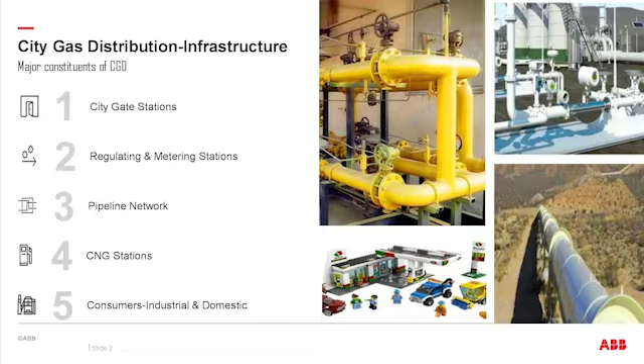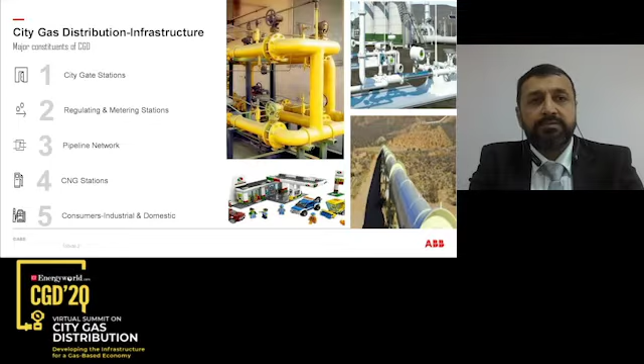So, what are the major challenges? A typical geographical area is widely distributed. Hence, firstly, it calls for meticulous planning to consider both the present and the future demand. And along with that planning, the infrastructure needs to continually facilitate the last mile connectivity as the network keeps on expanding. Now, the next point is maintaining the requisite flow and pressure in the growing network while keeping a strict vigil on the inventory, and pilferage control is no lesser challenge either.

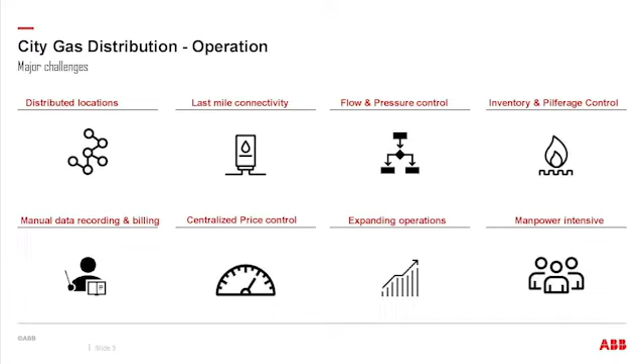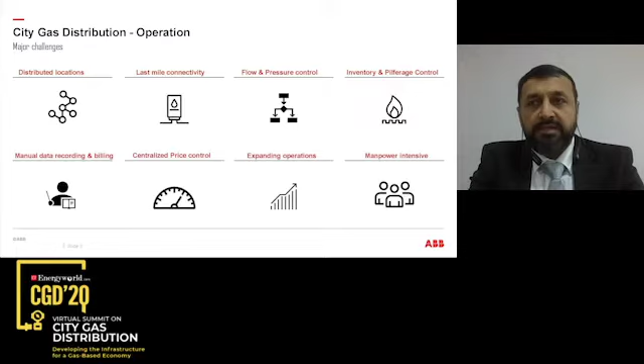Another very important factor is the ability of centralized price control and management. Now, since the CGD prices are subject to frequent changes, this would not be possible to achieve without a strong operational layer through which, with minimum intervention, price change can be administered across the entire network. And with ever expanding CGD networks, the selection of the right level of automation to eliminate manual intervention so that the CGD companies can achieve more with less is also a very critical point.

Let's look at the CGD infrastructure layer. Measurement, control, remote telemetry, and communication are the four pillars for building a resilient infrastructure layer. Gas flow measurement is achieved through flow meters and flow computers, whereas the gas chromatograph measures the gas quality. Add to this, transmitters, detectors, control valves, and the leak detection system ensure that the operation continues to remain safe and reliable.

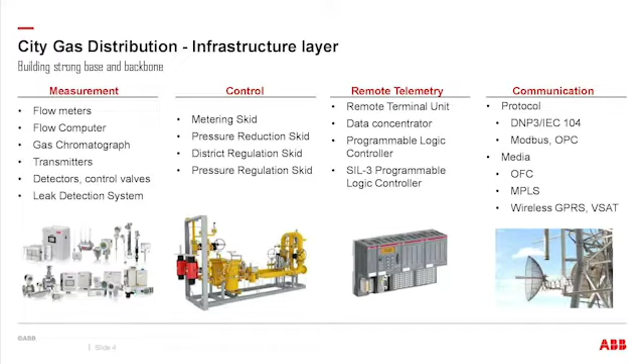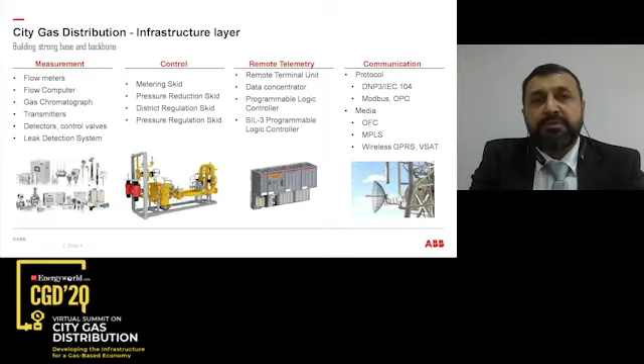After having achieved the measurement and the control layer, the next vital thing would be to have a real-time transmission of the field data to a centralized place. So once the complete measurement has been done, then RTUs or data concentrators or programmable logic controllers, through an appropriate communication protocol, through an appropriate communication media, which would be the best suited communication choice for the given geography, would ensure that the measurements are transmitted in real time.

Now, having realized a strong backbone at the ground level, which was the measurement, control, and the transmission layer, the next important thing is to select the right operational technology. That is the supervisory control and data acquisition system, which we all popularly refer to as SCADA. From our experience, we can say that execution of this very step often determines the strength and robustness of the CGD operational layer. And hence, in this slide, we will dive into the most important aspects that should be considered while selecting the operational layer, which is SCADA.

Firstly, for CGD, often the need is to have an ability to start small and expand with time. Hence, scalability is one of the most important factors for technology selection, such that the high performance real-time database management system would continue to effectively handle the growing needs of a gas network without any limitation whatsoever. So the idea is that you should be able to start with a smaller footprint and then continue to increase the footprint as the consumers, the network, and the spread in the geographical area increase.

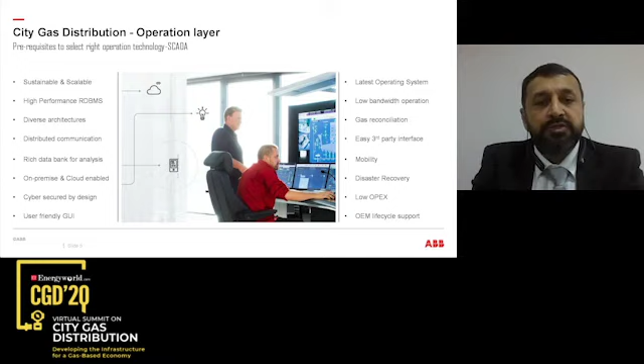The very important point here is also about selecting the SCADA system which is with the latest operating system, since it will enable a longer life cycle and it will support the very cause of operating a CGD with very low operational expenses. Selecting something which is latest would ensure that the overall OPEX cost is optimized, and hence the selection of the operational layer is one of the most important and a key contributing factor in the CGD operations.

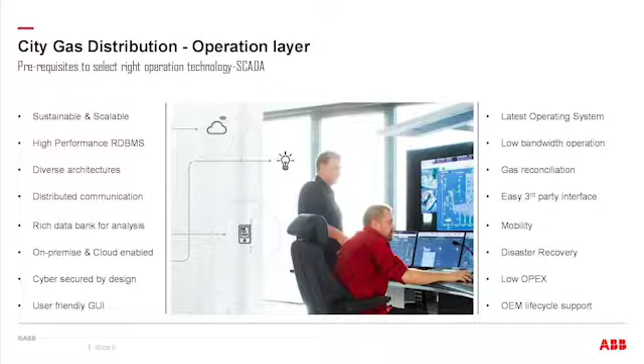Now, after having established a state-of-art operational layer, in the current times when things are becoming open, it is very vital that the platform that we have chosen is also cyber secured with adequate prevention mechanisms, which can range from, say, system hardening, robust password policies, user management, role-based access controls, maintaining the audit trails and security log, and the list goes on up to whitelisting of the IPs to ensure that only the whitelisted users have the access, thus preventing any non-certified or non-authorized user from accessing the SCADA system.

It is also important that the SCADA operational layer should be designed in accordance to IEC 62443 standards and recommendations thereof. Now, having established a cyber secure and state-of-art operational layer, the next thing which the CGD company would want to have is a seamless bidirectional transfer of data between the SCADA system and the chosen ERP platform.

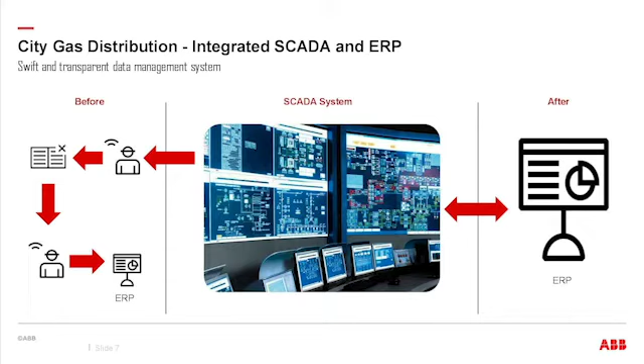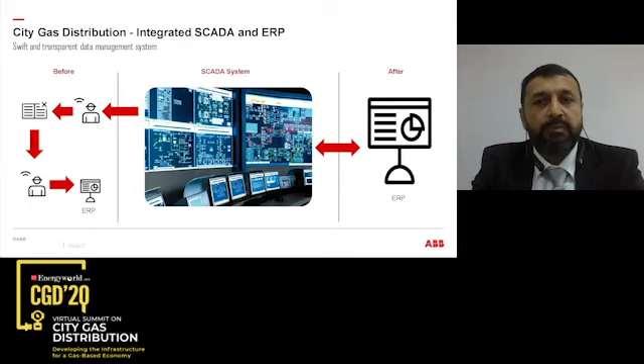And why it is important is because a bidirectional interface between the SCADA system and the ERP would ensure that there is no manual intervention, there is no manual logging, and hence there is no manipulation or room for manual error. So with this bidirectional transfer, the data integrity would be ensured, and it will also introduce complete transparency from field to the boardroom.

Last but not the least, let's also make the life of the operator or the person who is operating or managing or monitoring the command control center as comfortable as possible. Well, there are various choices that we have today of going for a multitude of screens with large display walls, which are very difficult to maintain, or we have some conventional solutions which offer very poor collaboration.

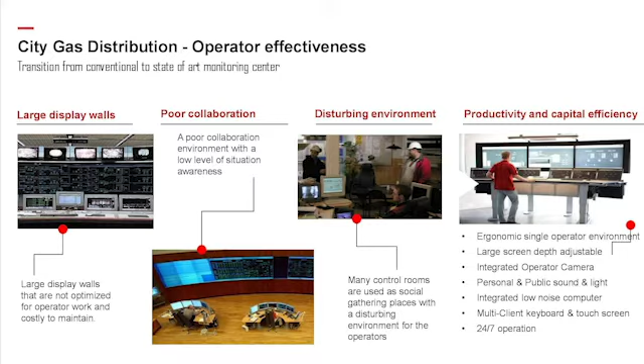However, the need of the hour, and what we have seen from our experience all the customers are adopting, is to have an environment which is stated on the rightmost side of this slide, which will promote the sense of collaboration, which will have all the information available to the operator on a single click. An operator will not be required to figure out information looking at various monitors or various screens, so much so that even your live video feed, the GIS, all of them can be integrated at a single place.

Now, with a strong base and the backbone in the field, which is complemented by the right selection of futuristic SCADA solution, digitalization is only a step away.

We, in fact, with all of these now have an Industry 4.0 ready platform to implement mobility for ease of operations, to have on-the-go data availability for actions, dashboards to monitor gas bought, gas sold, utilization pattern which can help decipher how the utilization changes across consumers, seasons, and all of that possibility is now made open.

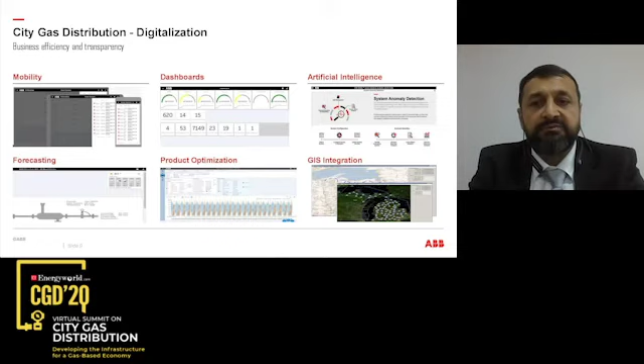This will also open up a possibility of artificial intelligence and a forecasting mechanism that would continually adapt based on the database which will now start building upon with time. And that rich database that we'll have will open up possibilities, operational efficiency.

And now if we club GIS integration along with this, it will add the feature of accurate identification of assets, their management, having video feeds of any such assets or any such operational requirement that we can actually think of. The whole point is that once we have a robust layer at the bottom, the possibilities then are unlimited.

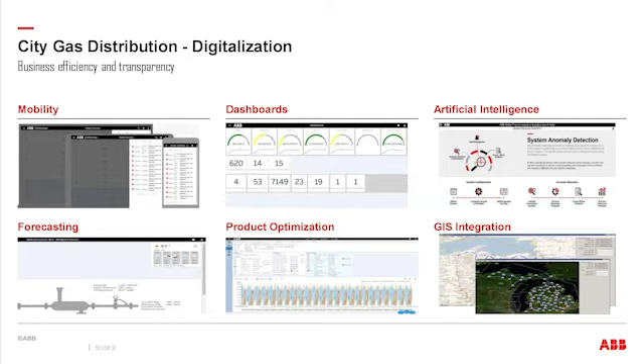One interesting topic which I would like to touch upon here is drone-based leak detection system. We all know and we do realize how important it is to identify the leak and arrest it in the shortest possible time for continued safe operations, for the overall safety and also the overall reputation.

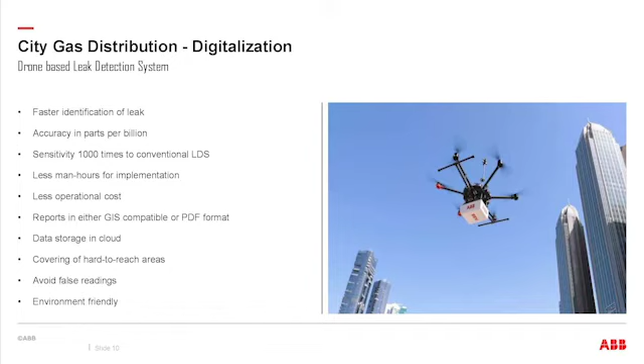The drone-based leak detection system with an inbuilt gas detector will not only improve on the response time, it will also improve on the accuracy, it will also make the whole process faster. And if this is mapped with the GIS, it will facilitate the accurate identification of leak location with the longitude and the latitude. Now we'll have a look at a few case studies here.

The first such case study is on Assam Gas Company Limited. The challenges that the company faced were on the ability to optimize the gas flow and ensure that the contracted volume is delivered to the user at the given flow and pressure. And this was achieved by implementing a strong measurement and control layer in the field, comprising of instrumentation, control, RTU, and a customized telecom solution to overcome bandwidth challenges.

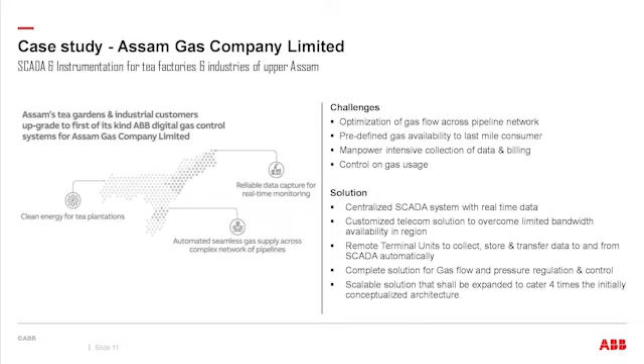Now, with this strong backbone, the data was then made available for centralized control and monitoring, along with gas reconciliation. The offered solution is also completely scalable to cater to the multifold increase of users across the state of Upper Assam.

Next case study, which I would like to share here, is on the SCADA system that was initially deployed for only a very few locations. However, in a span of few years, it has grown multifold, encompassing a very, very vast geographical area and efficiently catering to the expanding network, both of stations and the users. This is a true example of a SCADA system that can be deployed with a very small footprint and then expanded with time with practically no limitation on scalability.

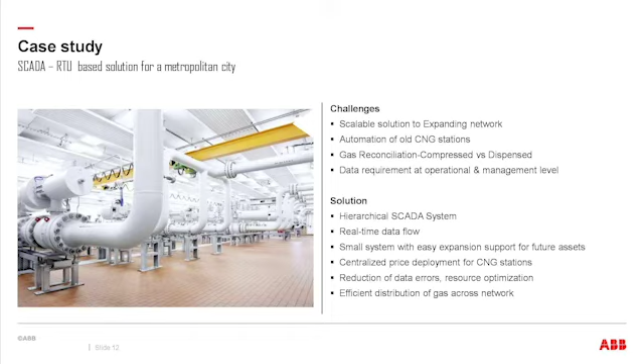Also here it is important to mention that the feature of centralized price deployment is utilized by the CGD company on a very regular basis in its day-to-day operations.

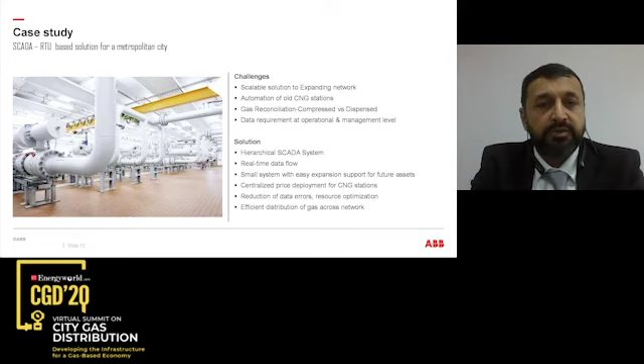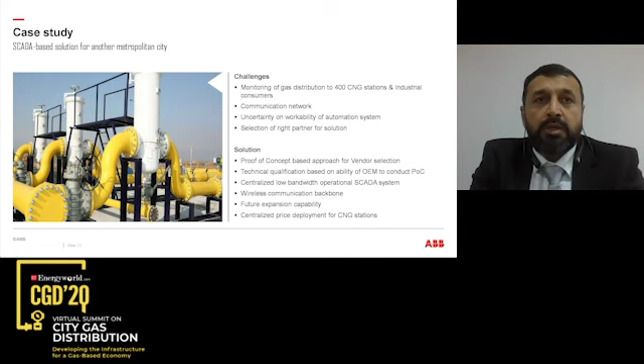The last case study which I would like to share here is on the SCADA-based solution for another city where the challenges were slightly different. The challenges were on the confidence level, the challenges were on whether a SCADA will work or not, the challenge was on whether we'll be able to select a right partner for solution or not.

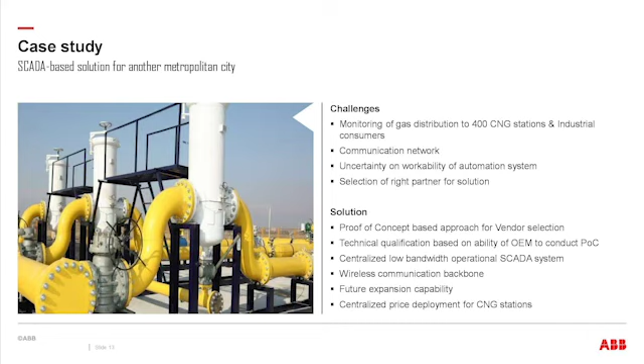Now, here in this case, it so happened that assessing the capabilities of the automation partner is a very crucial step that determines the success of technology being deployed for the operational layer. And to ascertain the same, in this very case, the approach was adopted that a proof of concept demonstration should be done in the bidding stage itself, and the results of that were made a part of evaluation. This approach certainly ascertains the right selection of the technology partner.

Summarizing the session now, selecting the right technology in the field and for the operational layer does enable the CGD company to choose a platform that is scalable, provides accurate control and monitoring, permits centralized price control and billing.

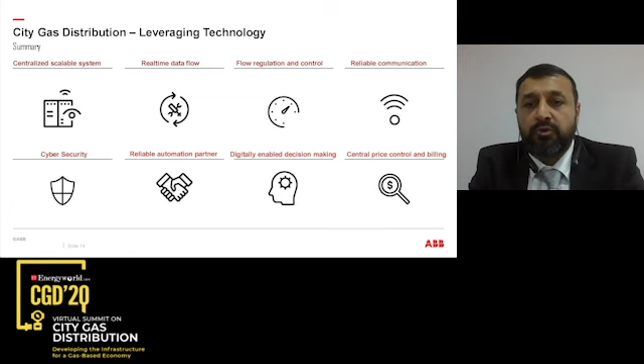And this operational platform should be futuristic, should be Industry 4.0 ready, such that the rich data bank is utilized for digitally enabled decision making, with all the information from field seamlessly flowing to the command center and from there to the boardroom. All this can be achieved with a reliable, experienced and well-qualified automation OEM as a partner for profitable growth.